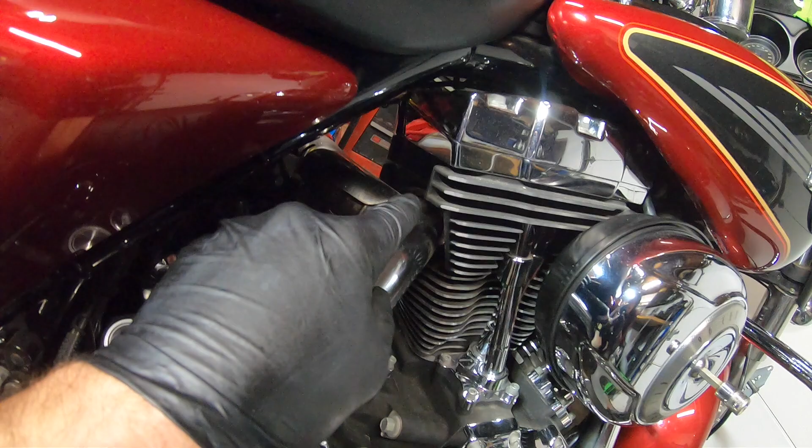So before I did anything, there's a couple bolts in here that I've been squirting with this good old PB Blaster for the last couple days, just to make sure that they'd come loose. And that is the bolts that go into the heads for the exhaust. So there's two 1/2-inch bolts on this part of the exhaust, and on the front portion of the exhaust, two 1/2-inch bolts as well. And there's a couple pieces that kind of tie this exhaust together.

This is a weird exhaust because the front tube kind of just goes back, and then the rear tube kind of ties into the side of the front tube, and then it also goes out the other side. So the exhaust comes apart over there, so you could pull that portion off, and then this piece right here, this little Y piece, this will come off of this side. So we're going to pull that off. We have to get the seat off. We're going to disconnect the battery. We're going to pull the tank off.

We'll just get the air cleaner off because it's in the way. We'll see if we can unplug all that throttle body stuff. The throttle body's right here in the middle. It's got a bunch of plugs in it, so if we have to take it off, we will. If not, we'll leave it on.

I don't know which route we're going, but I need to pull this engine out regardless, and I want to start cleaning up the frame and stuff like that. This bike has a lot of miles. This bike right here has 104,861 miles. Same bottom end and everything like that.

Now I want to go over real quick why I'm actually pulling this engine. This bike specifically, remember I told you, this first year, the 96, the crossover year. They ended up having crank problems because the crank—there's a flywheel on each side of the crank. It's got a pressed-in pin that holds the connecting rods for each cylinder. Everything's pressed together, nothing's welded, so each side can kind of, over time, get out of alignment, and it's called crank run out.

I do not. This tank has a saddle in it, so it's got this little fuel line that connects the two together from the front. I don't know how much gas we have in here. Let's see—I remember when this broke down, we just left the gas station, so I guarantee you this thing has a full tank of gas in it. Tough break. So we're gonna try to get around draining the whole tank.

A lot of talking, but I'm making this video because I want it to be as descriptive as possible, no matter what engine we choose—a 96 will just go right in, a 103 you'll have to do a couple things, no big deal. Basically whichever one I could find first. Sorry for all the talking. Hopefully that helps anybody who doesn't know anything about Harleys, because that was me like 3 months ago.

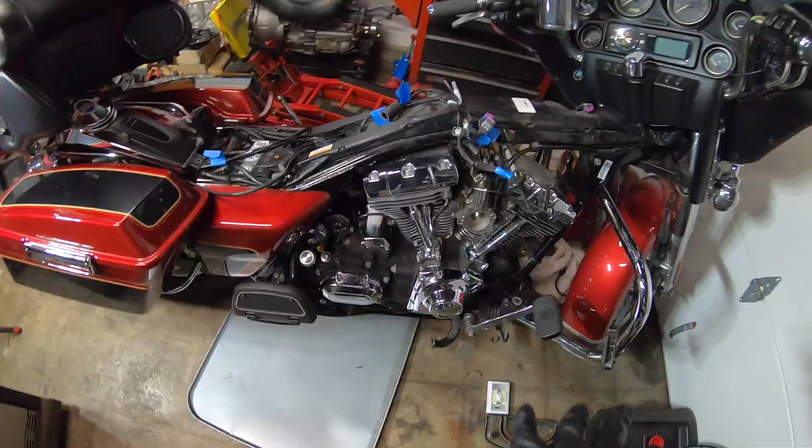Got the exhaust off. We got all these wires unplugged from the throttle body. What I went ahead and did was just kind of zip tied them out of the way, so everything from this side of the engine is free except the throttle cable.

So there's these throttle cables—there's 1, 2, 3, there's 3 of them. Either you can spend the time, loosen up your throttle cable and get them off, or you can just try to snake in there and grab the throttle body bolts. I believe they're 1/4 inch, so there should be 4 total. Then the whole throttle body would come out and you just throw it up here. I think that's what I'm gonna do.

And yeah, then we're good. Oh yeah, I had to go borrow a tool from work. So this was my original tool for the starter.

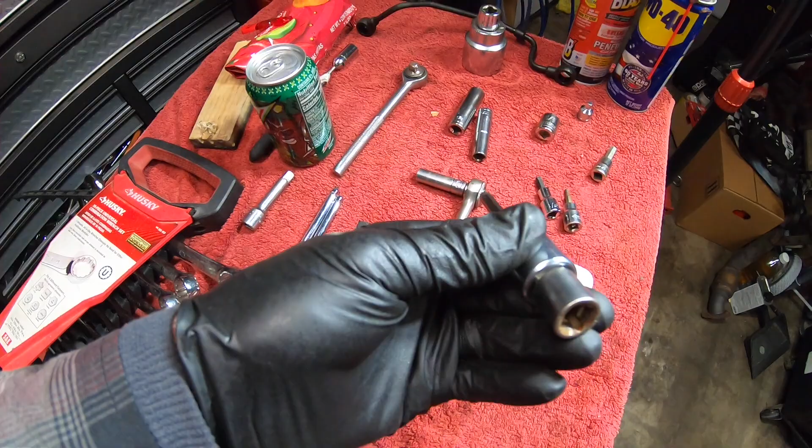It is a 1/4 inch hex Allen on a 1/2 inch drive, converted to a 3/8, and then I had it on extension. So that was really kind of a pain in the ass. It wouldn't fit in the right starter bolt. So I went ahead and went back to work and borrowed this one. This is a 1/4 inch 3/8 drive, so it's way less thick. Hopefully this will be able to crack our other starter bolt loose.

Then after that, oh, the primary. I did get the primary off. The outer primary was a piece of cake. The only problem was there's one primary bolt that was being blocked by the foot peg. What I had done was I just broke it loose from the kickstand. I did that, got the outer primary off, and then here you are down here, right?

So let me get some light on this situation real quick. All right, so here's where we're at, right? You have your compensator over here, your clutch basket over here, and then the chain that combines the two together. Then you have your whole starter assembly, Johnny, your flywheel and stuff like that.

So a few things we need to do before we start trying to pull this primary off. We got to get the starter out of there, so we got to get that other bolt out, and then I think that should just pop right out. And then we have our compensator.

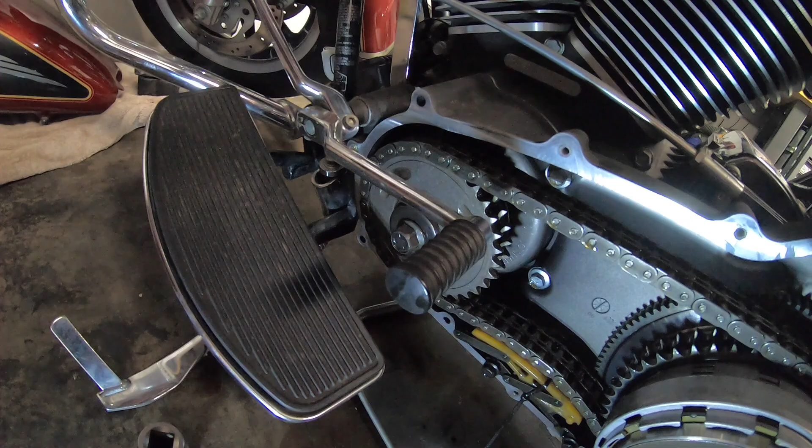Now, I don't know, I looked up a ton of things. Some say it was a huge Torx, like a T70. Some said it was like a 1.5 inch bolt. Mine, I only really have a lot of metric tools. Mine ended up being a 22, so I don't know what that equates to in standard, but I was able to crack it loose with a 22 with no damage on the bolt, really.

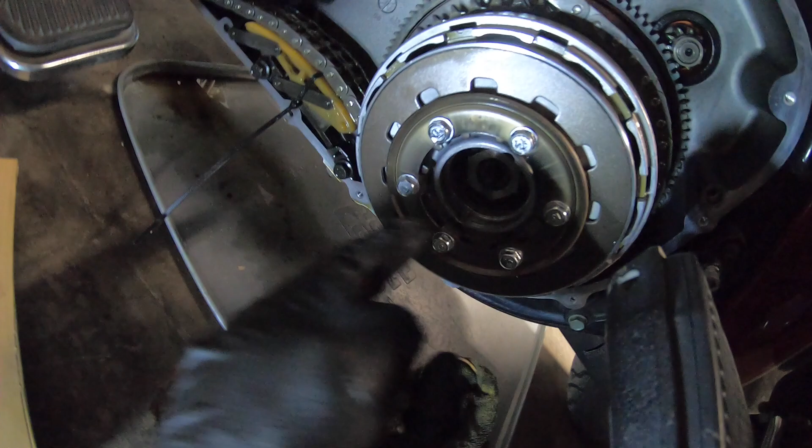And then this one back here, so there's a couple things. First things first is you have a snap ring, and then you have your clutch adjustment, and I'll show you that. I already pulled those off. So here's your snap ring. You can get that off with some basic snap ring pliers, and then once you have that out, this is what you use to adjust your clutch. So there's a locking nut right here.

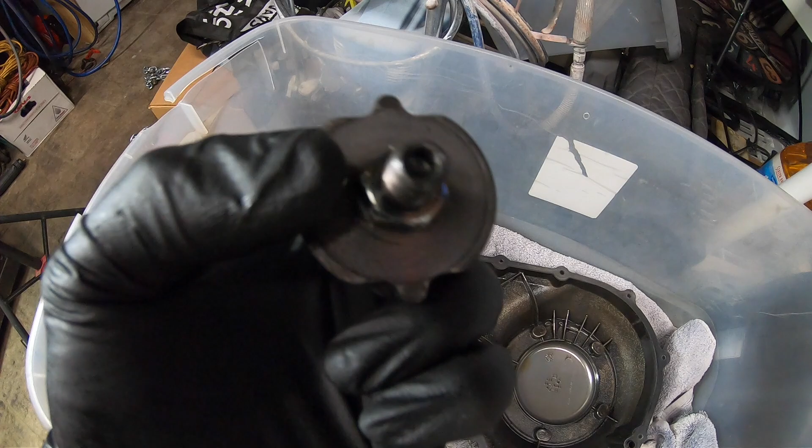I believe it's like a 7/16, and then you have an Allen. Now, if your clutch is already adjusted and you plan on putting a new motor in and putting your clutch exactly the way it was, you don't really need to loosen any of this. This just slides right out, because when you push in your clutch, it pushes out this huge rod, I don't know what you call it. And then this just slides right in there, right?

And then, yeah, once you get the snap ring out, you pull this out. Oh, here it is, now it wants to come out. Long Johnny, I'm just gonna go ahead and leave it in there. I don't know if it's directional, not really sure. I'm just gonna shove that in there, and then we have this big huge nut.

Now what's weird to me is I did look it up on the internet, and it says it is a 1 3/16 inch socket. Now I have one right here, also borrowed it from work, shout out. So I put it on here, it's got a lot of slop to it. See that? So I looked up metric, and it's a 30.

Threw a 30 on there, has a lot less play. So I think we're just going to go ahead and use the 30 mil. And yeah, so that's that. So we got starter, compensator, clutch basket.

So before you do any of that, you have this tensioner, right? So on the '07 Plus, it's an automatic tensioner, and it's pretty easy to get out. All you do is you snake a zip tie around it under the chain, and you keep it compressed. Now you want to keep it compressed so that when you pull it out, it doesn't try to go crazy on it because it thinks the chain's loose.

So yeah, what you do is you do that, you hold it together, and then there's these 2 1/2 inch bolts, so we're gonna go ahead and pull those out. It will give us slack in our chain. So if you just needed to change your compensator, you don't need to take this off. You just undo the tensioner and you can take your compensator off, you don't have to take this off. But we're pulling the inner primary off, so we have to take everything off.

So we're going to go ahead and do that real quick. Hopefully I don't break anything trying to get this bolt loose. I know I didn't mention this in the video, but this nut is reverse threaded, so make sure it's lefty tighty, righty loosey. We have a breaker bar here and a couple extension handles. We're going to get it done. Once we get that off and start pulling the inner primary off, we'll get back to you. And just like that, we got everything out.

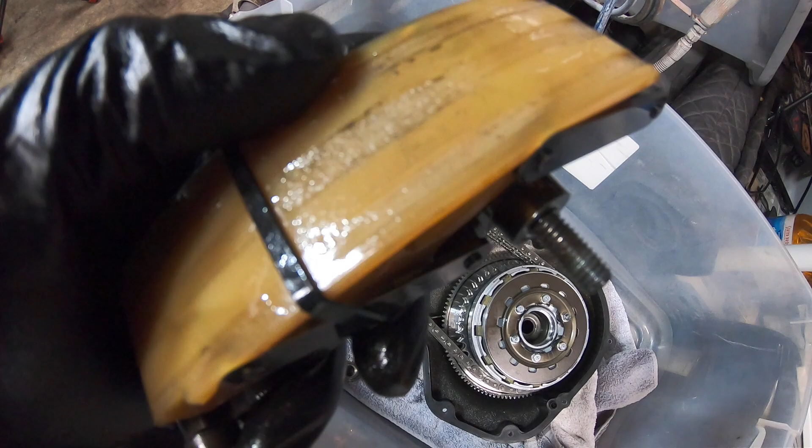Guys, I am no professional, but I watched a lot of videos and read a lot of forums, and they say if these tensioners have any bit of wear on them, or they're showing any signs of wear, replace it. So this is getting replaced. Also, I noticed when I took this off, 2 washers fell off, so make sure you keep those with that.

And this bolt was a pain in the ass to get off. I had to do it with the impact. I sat there, ooga-dooga'd it for about 10 seconds, and it started to break loose, because I believe this is red Loctite, Johnny. And here's the compensator right here.

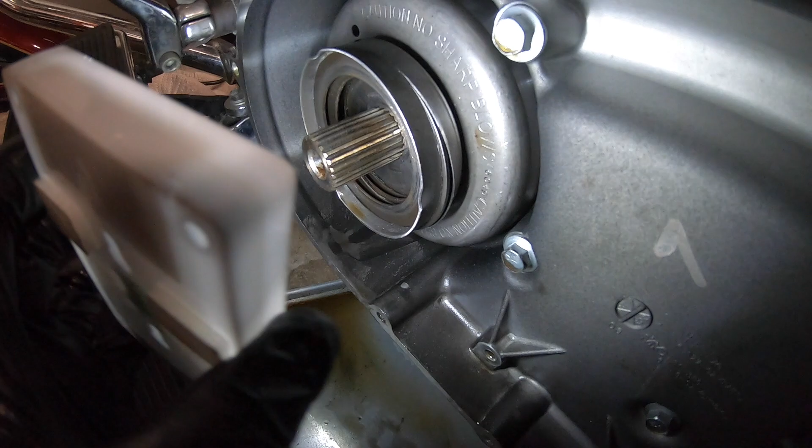All this stuff's looking pretty good. I heard you should check the spring tension on your compensator. Now either that's cracked and it looks like this thing's about to freaking explode, or that's normal. But it for sure looks cracked. So I'm really glad I'm digging into this, because it looks like that son of a bitch is about to split apart.

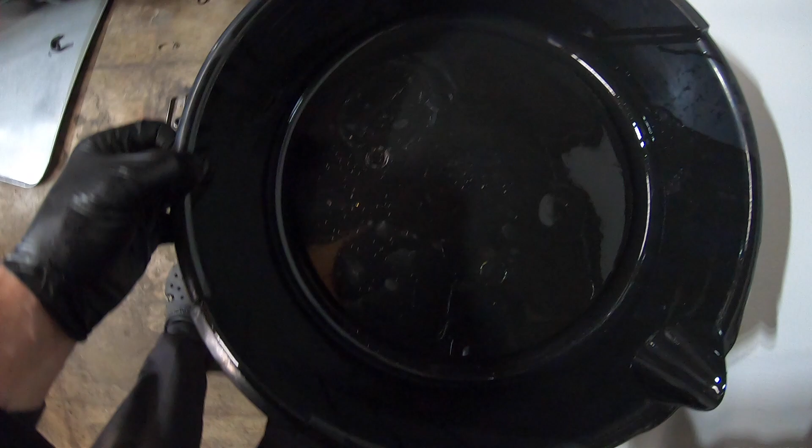The reason why I'm glad I took this bike apart, obviously, there was metal in the oil. I don't know if I showed you that yet or not, maybe I did, I don't know, I'm pretty crazy. But you see there's metal in the oil just sitting in there. So see all of it?

Ain't looking too good. So yeah, on top of that, it looks like that part of the compensator, slash the magnet for the stator, it looks like that thing's about to blow up too. So what I'm assuming is this crankshaft scissored, which means it came out of true and it just started jacking everything up in the motor. And I'm pretty sure if I look at the oil pump it's gonna be trashed as well, because once that thing comes out of center, you start messing up everything that has bearings in it.

Starter, super easy. I just pushed the jack shaft, pushed it right out of the primary. So that's it. And then 1, 2, 3, 4, 5? No way, 5 more bolts and we got this off.

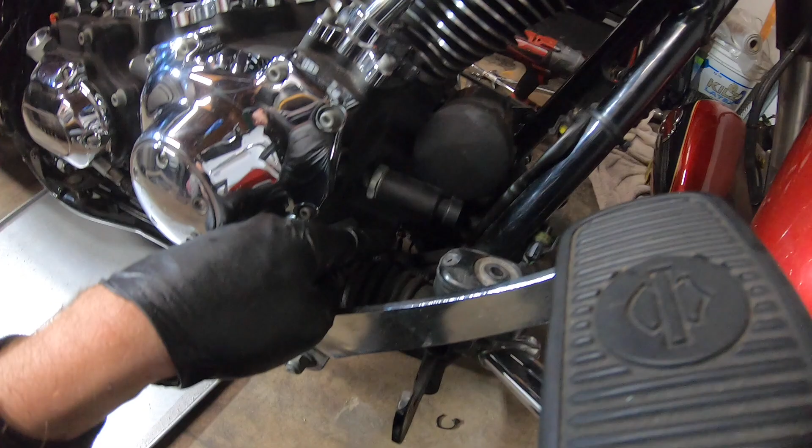I believe the voltage regulator rectifier, this up here, we'll have to see where it plugs in and where it mounts. Then you have the motor mount down here, and the motor mount up here. I started loosening the motor to transmission bolts, and the case pretty much separated from the transmission right away, so I stopped doing that. But all 4 bolts are loose. That was a 1/2 inch, so there's 1, 2, and then same on the other side, 3, 4.

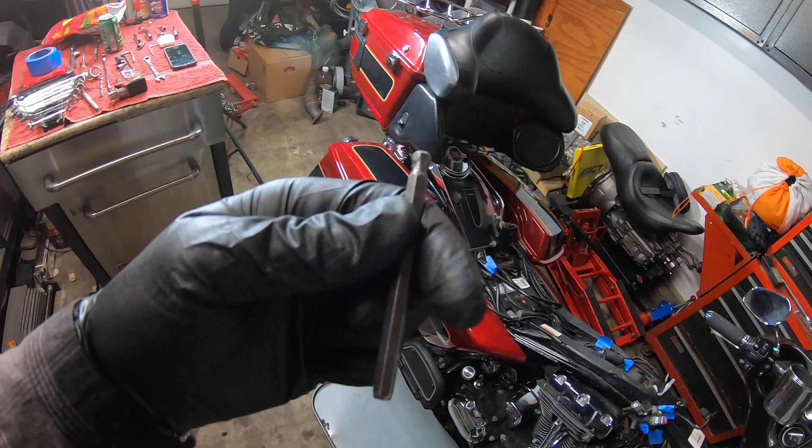Now this throttle body, I've been messing with this probably for about an hour. With the mixture of this 1/4 inch Allen wrench I cut down, I was able to loosen the 2 bolts over there on the side with the horn. And then over here, it freaking sucked, but I guess I could have used the stubby over here too, actually. What I did was, I kind of made this little swivel, Johnny, the one where you stick it in and go at an angle. So we were able to snake it down in there and get these 2 bolts out.

So the front 2 bolts on the air cleaner side need to come out, and then the rear 2 bolts you just need to loosen because they are slotted. And then this whole thing should come right out. Yeah, sure did. Came right out.

So yeah, that's pretty much it. We're gonna take this and just toss it right over here. Don't want to bend up these lines too much because there's something back there. I don't know if it's cruise control, I don't know what it is. So we're gonna bungee cord that up.

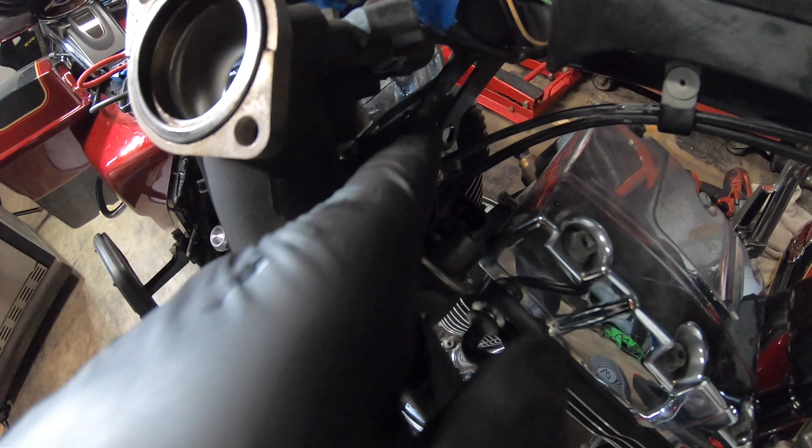And then as for the motor mount, I was able to get that out. I believe that was a 9/16, maybe. So there's 3 total bolts. One goes right here, the little Heim joint. The other 2 are actually on the horn bracket, and those go to the cylinder heads right here. Bang, bang, so there's 3 bolts right there. So that's done, 9/16. Then I took off the voltage regulator down here.

That was 2 7/16, that bolt and that bolt. So it's kind of hanging.

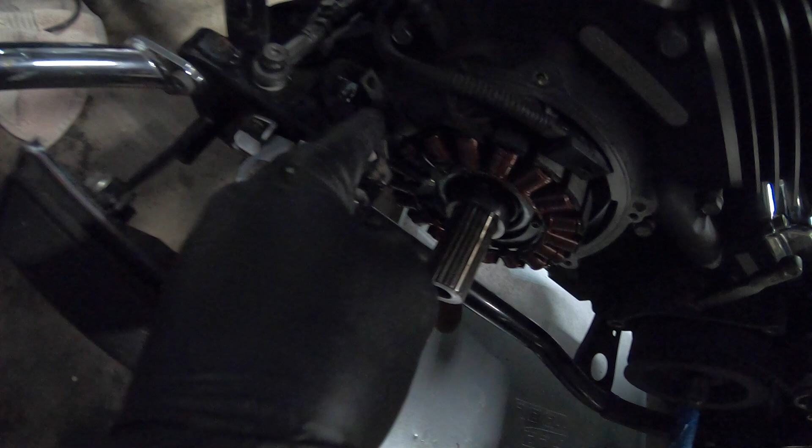What I did was I unplugged the voltage regulator and, I don't know, is that a crank position sensor? Maybe the crank position sensor. I just shoved the plugs right here where the stator's at, between the stator and the case. That's out of the way. So literally this engine is 99% free other than this lower mount.

This lower mount, I don't really know how I'm going to do it because it mounts in a few places. Here's a hard mount right here, and then there's a rubber mount down here, and then there's 2 bolts that go to the block.

So I'm going to start taking off probably the bolts that go to the block, and then the motor will be 100% free. Technically, it should freaking fall out. I believe it's doweled in between the case and the transmission. We'll go over that once it's out.

Also, what I'm going to do is get a strap, not a ratchet strap, one of those pull straps. I'm going to go around the bottom of the transmission and hook it around right here at the top of the frame, because nothing's going to be holding the transmission up anymore. We'll put some tension on it so that when we pull the motor away from the trans it just doesn't fall down or whatever. I don't really know what's going to happen.

So probably leave it for tonight, because once I loosen that front mount, there's nothing holding this engine in anymore. So yeah, anyways, I'll see you guys in a minute.

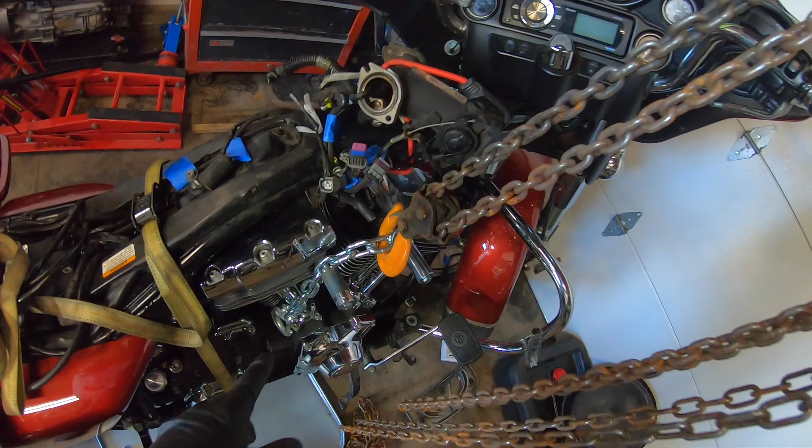I seen online people would mount a plate, an engine plate, to these breather holes. Now, I don't really think it's a good idea, but at the end of the day, this isn't like a car engine, it's a Harley engine, it's not that heavy. So what I did is I just got a long bolt, but I wanted the chain to stay over here, because the further the chain is over here, the more stress it puts on the bolt.

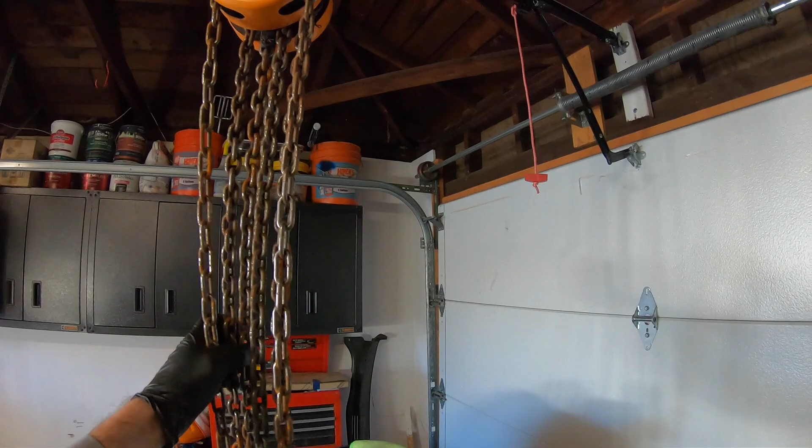So I used a socket, I kind of snugged those up, I made sure the threads bottomed out inside of the head, that way we got as much contact as possible. I had this freaking 2-ton chain hoist, here's my rafter up here, so I got this thing rigged up.

I just pulled the trans bolts out right now, so there's a couple dowels in there, we have to separate it from the dowels, so we have to push it forward. The front engine mounts, I have the nuts off of, now the bolts are just sitting in it, and we'll see if it wants to come free.

I'm gonna start, the hoist is already doing a little bit of the work here. Hopefully we can get this engine out safely and not drop it. It's not like we need it anymore, but still.

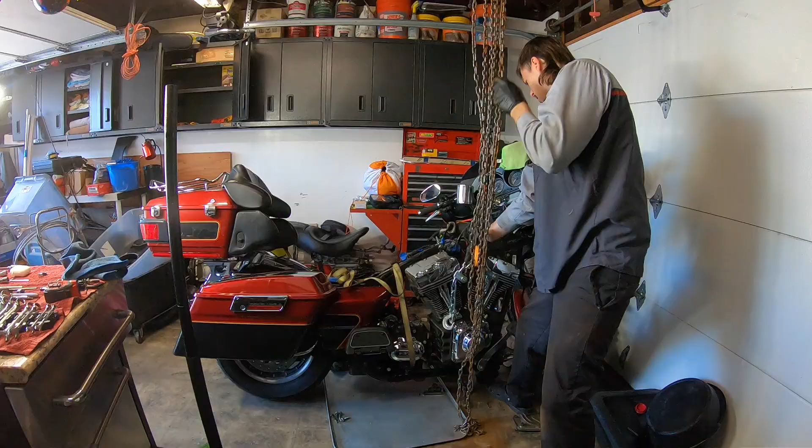Trying to be easy on this old girl. Come on, baby. Motherfucking V-twin.

We did it. If you look on the side stand, it almost puts the motor at the complete right angle, that way you're not sitting there fiddling around with it. So this is holding the weight, and then you could just adjust your level, obviously with the engine hoist or chain hoist or whatever, you could just slide your engine in without wrestling it. Now I'm going to put this down because, yeah, this worked really well, and I would hate for things to go sour real quick.

Here it is, my new to me Harley Davidson 103. Whoa, that rhymed, holy cow.

So at this point, I was just going on how dirty the motor was and how I went to clean it, but I didn't mention what bike this motor came out of. This 103 came out of a 2014 Dyna. Now, the reason why I chose a Dyna engine is because the Dyna also has a throttle cable throttle body, just like my bike. The newer touring models have those drive-by-wire throttle bodies, and it would have been a pain to convert it and switch throttle bodies and stuff like that. So this one ended up being perfect.

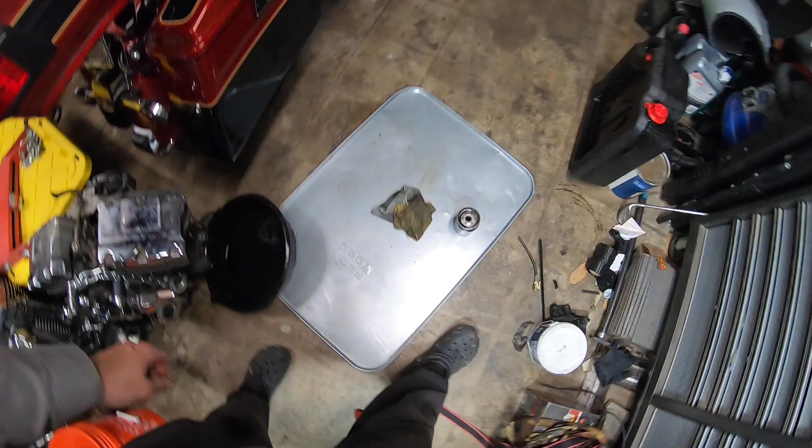Another reason why I chose this engine is because it mounts exactly the way my bike did, and it just made everything really easy and painless, and this swap was just going to be a breeze, other than the tuning, of course. So I just cut open the oil filter, and there was nothing in there. Nothing in there. The oil's really dirty.

It's a good motor overall. It looks pretty good. It says it has 20,000 miles on it compared to 100,000. This sucker has 100,000 miles, and it still looks cleaner than this one.

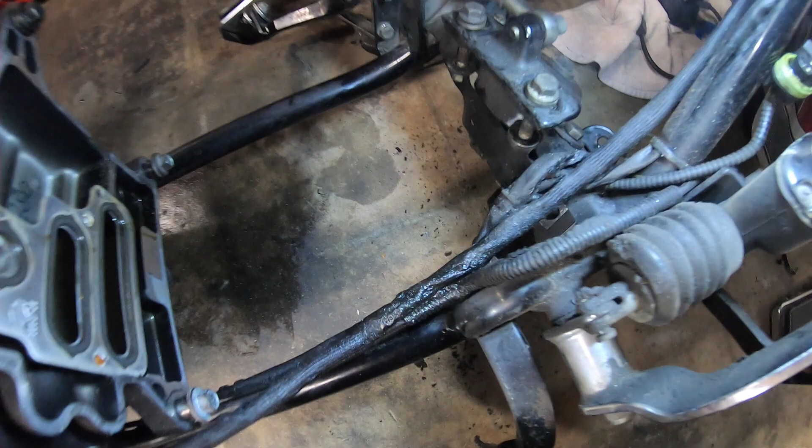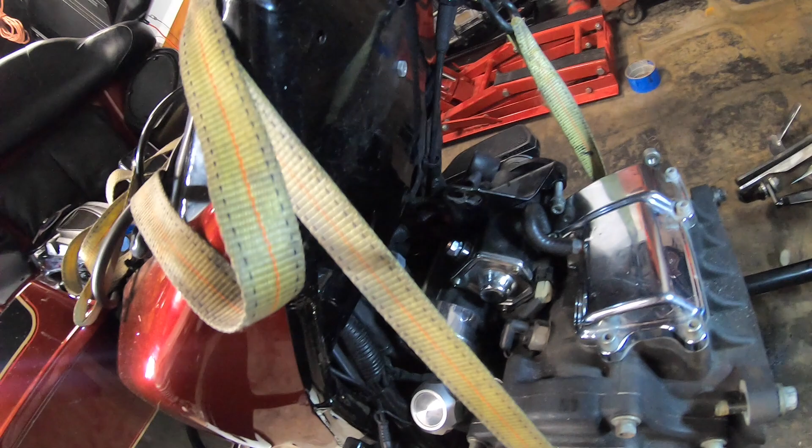And also down here on the bike, we got a fair share of cleaning to do here too. I'm gonna go ahead and clean everything on the front of the frame. I'm gonna pull the motor mount off up front. I'm gonna clean all that. Everything in the back looks pretty good. I'll probably dust off the trans, and then I gotta make sure I cover that. And I'm gonna start ordering gaskets.

But for now, we're gonna put this pan under the bike, spray some degreaser on it, and we're gonna clean it up because I don't like dirty stuff.

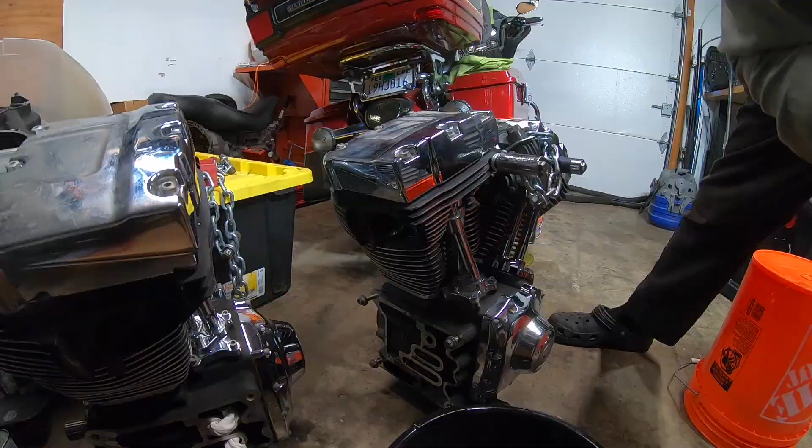Hey, we're back working on the Harley Davidson. So I cleaned up the engine. You guys saw that, so it's pretty clean. It ain't perfect, but she'll do. Once I get it in and everything kind of set back up, then I'll go for another clean.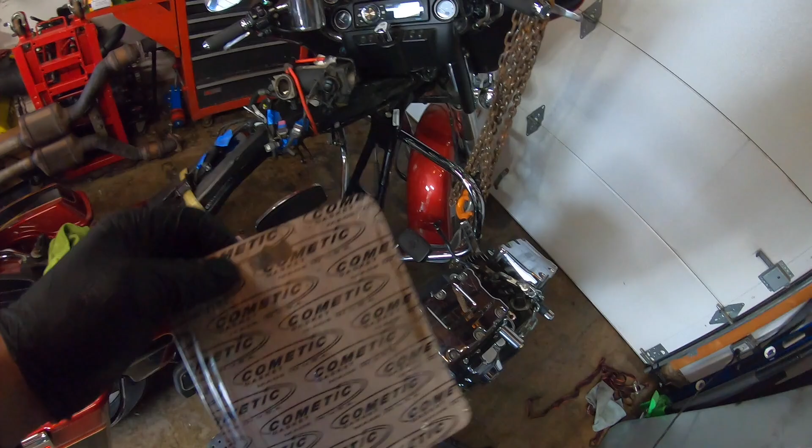I got this off of eBay. It's a Cometic gasket, so that's what I'm going to use to mate the engine to the transmission. So if you see over here, they got these little tiny push-in clips that hold the gasket to the transmission, so that way you don't have problems mating them together. There's 2 dowels on the bottom, so once we get this engine floating, we're gonna kind of tilt it in, get it on the dowels, and then we got our 4 bolts.

Where are they? I lost them already. Anyways, they're somewhere - no, those are the old ones. Oh, here they are, we got our 4 bolts right here. There's 2 short ones and 2 long ones. Don't quote me on this, but I believe the short ones go on top and the long ones go on the bottom. So if you can, chase your threads, because there's probably leftover Loctite in them.

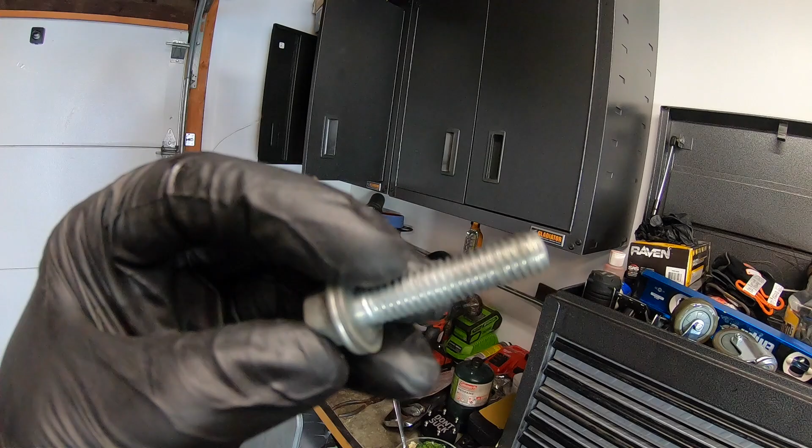And I hit these with a wire wheel. So once we put them back in, we'll put some more Loctite on it. I gotta figure out blue or red. So yeah, we're gonna get this thing hung. So I have my rig set up again right here. We're gonna get this thing nice and hung. We're gonna get the engine right back in the bike, hopefully within the next 10 or 15 minutes.

The GoPro battery died, so we tried using a phone, and then a bunch of people started coming over. So then I literally just was like, hey, help me put this in. So now I'm just starting to put stuff back together. Went ahead and wiped the motor down again because I don't like my shit dirty.

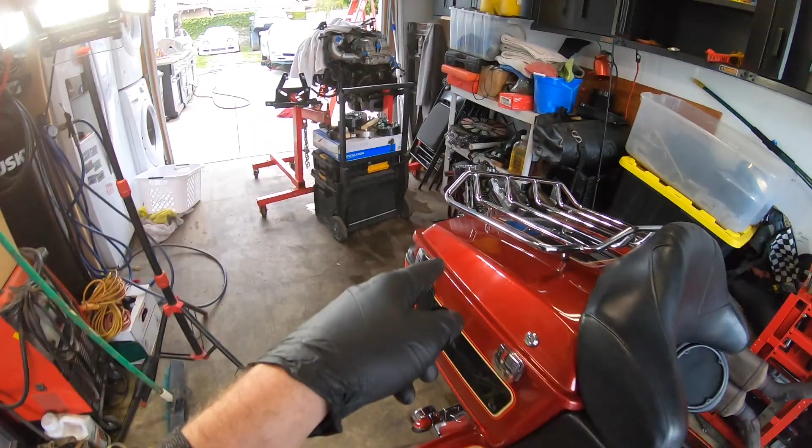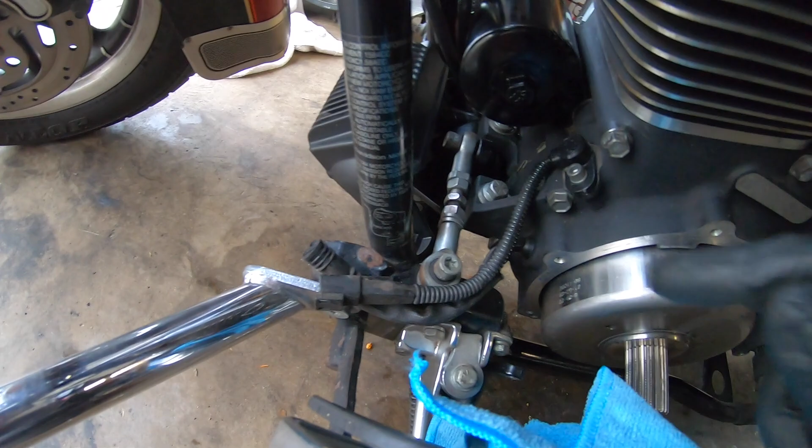Also, what we're gonna do, we put the upper mount back on. So I went ahead, put a little Loctite on those too. We got that back, the engine is fully mounted. And then I got this one back on too. I got these bolts in right there, and I was able to get some Loctite on those. It's really nice, everything looks really clean.

Now what I have to do, we're gonna bolt this rectifier regulator. Luckily, everything plugged right in. Everything plugged right in. And then what I did was I had loosened these throttle cable adjusters, and I was able to pull the old cables off of the old throttle body, which is somewhere right here.

I was able to pull the cables right off of that, including one I'm not really sure what it is, but I'm pretty sure it's cruise control. We were able to pull those off and put everything back on.

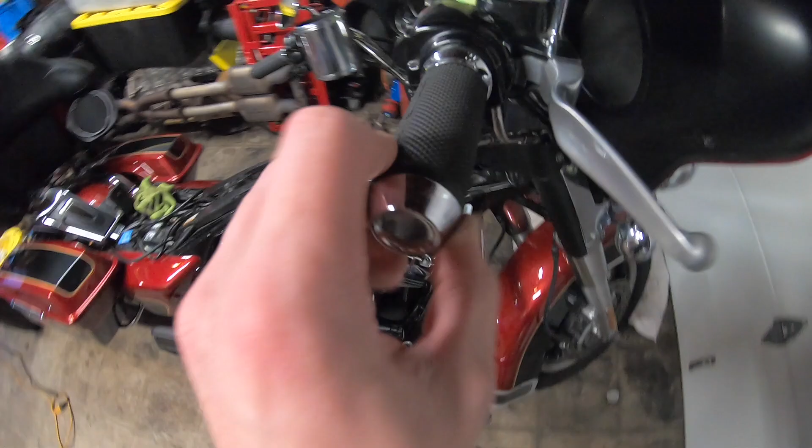We adjusted the throttle up again so it has very little play, and got a good snap. Even the old air cleaner bolted right on. Like I said, it's pretty much the same exact engine, just has a bigger bore, and obviously it's newer with less miles. So everything plugged right in, injectors and all that stuff.

I really didn't want to take the throttle body off of this motor because they're kind of a pain in the ass, but everything plugged right in. The only different thing I noticed was this vacuum line - it goes to somewhere, maybe your gas tank or whatever. The one behind it just has a plug on it, so we're gonna leave it like that. Hopefully that's okay. Everything else is done.

Now what I did do is order the automatic compression release harness, because on this 2007 model, I believe they have the revision in the ECU to allow you to enable it, but you need the harness, and this one doesn't have it. So we're gonna check out the instructions. We just got it in the mail, I'll show you the part number and we'll go from there.

Here is the ACR compression release kit, called a wire harness ACR overlay. It fits 2007-11 Dyna, 07-10 Softail, and 07 Touring models equipped with automatic compression release cylinder heads. So I have an 07 equipped with compression release, and we went ahead and got this kit. I believe if you have a newer Touring model, you'll need a different kit, but for Softail and Dyna this kit will work from 2007 to 11.

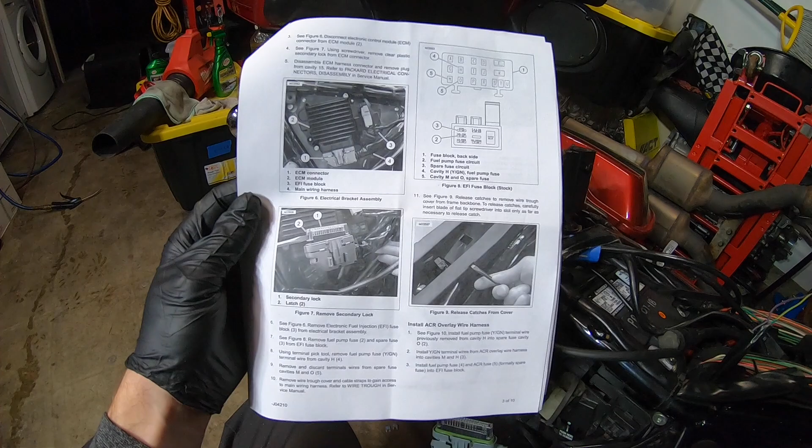Okay, I'm gonna give this a quick explanation. This is a Touring model, so I'm gonna go over the Touring model, but it has Dyna and Softail instructions as well. I'm just gonna show you this page because this is really all you need to know - you wanna freeze it, go ahead. Basically you take your saddlebag off, take this cover off, and it leaves you with all this stuff.

So here's your plug for your ECM, I just went ahead and unplugged that, pretty simple. And the instructions say you separate this plastic cover by these little clips - you just take a screwdriver, and there's 3 of them.

There's another little cover, so you need to take this off. The way you take that off is these slits have a little black pin in there - you just push it in with a little flathead, take that off, and it reveals all the pins. So I'm just gonna leave that sitting there.

So on here it says you need to take this purple wire with the ECU terminal on it and put it in pin 15. Luckily Harley makes it really easy to label - you see those two little blue plugs right there? Those are pins 15 and 16. Number 15 is on the left.

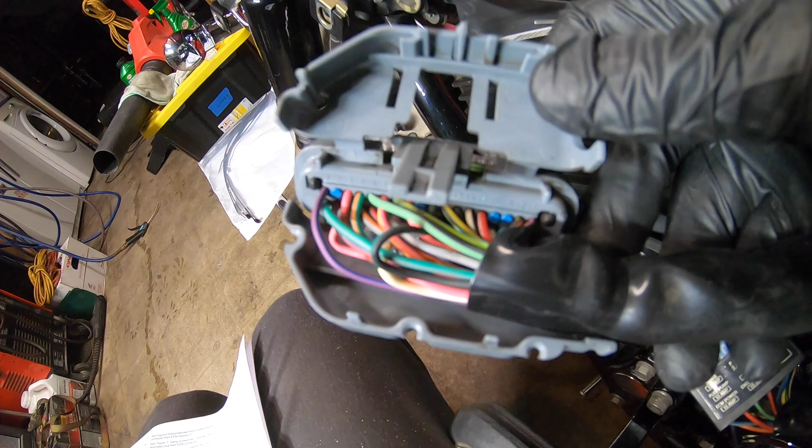So we're gonna pull that plug out and then literally just stab it in right through, give it a tug. These two blank spots right here, the pin on the left's gonna pop right through and it's gonna lock in place, and then you're good to go. You put this back on, you close that back up. So that's one pin.

The other two are the same. Basically what you do is, it's kind of weird - it goes from 2 to 1 and then back to 2, I guess.

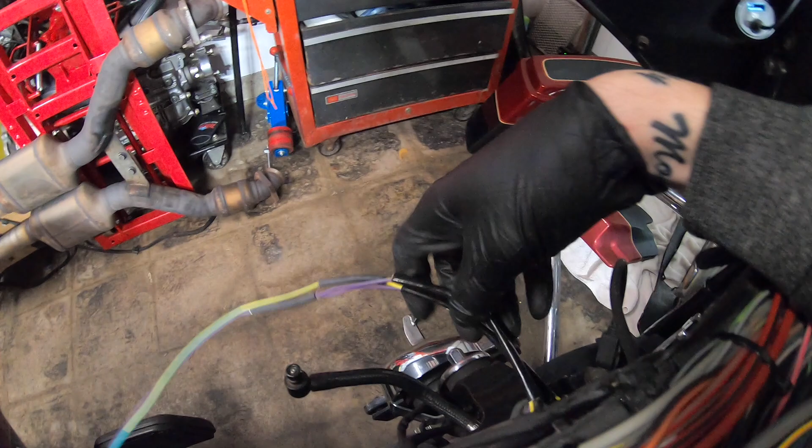Okay, so check this out. Basically what I did was take my harness, plug it into my automatic compression release plugs right here, and then feed it right through my little valley cover right here. We're gonna feed it through and tuck all these wires in somewhere, then come back down here.

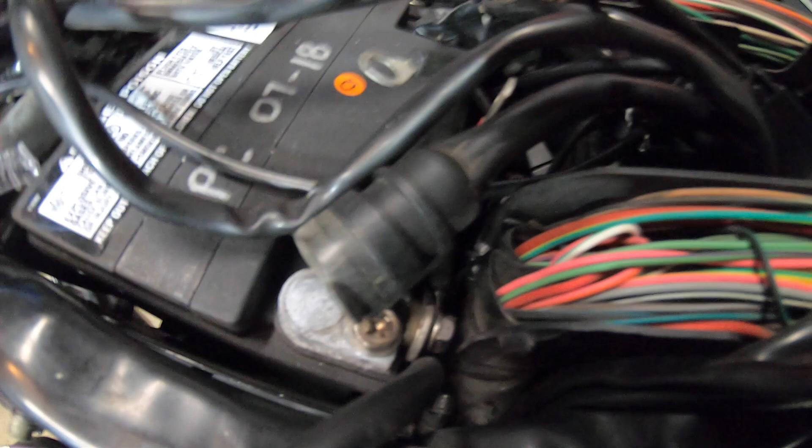There's a few ways you can go. I think there's an exit right here, so I'll just catch it out of this exit and then put that cover back on, because this cover is a pain in the ass to get back on - I already tried. There's a lot of wires in here. As you see, this one was previously crushed, but we're not gonna worry about that.

So these two wires, you're gonna be dealing with this. Now this is tucked up in there - you see where it says push here to remove? So you push that and then pull it down. It's kind of tucked up in here a little bit.

So when you pull that down, you're gonna get this, right? There's more fuses on here. I already took 2 out, see them down there. So those 2 cover these 2 spots right here on the left. These 2 in the middle, the empty ones, don't worry about it. We're gonna be working on these 2 right here.

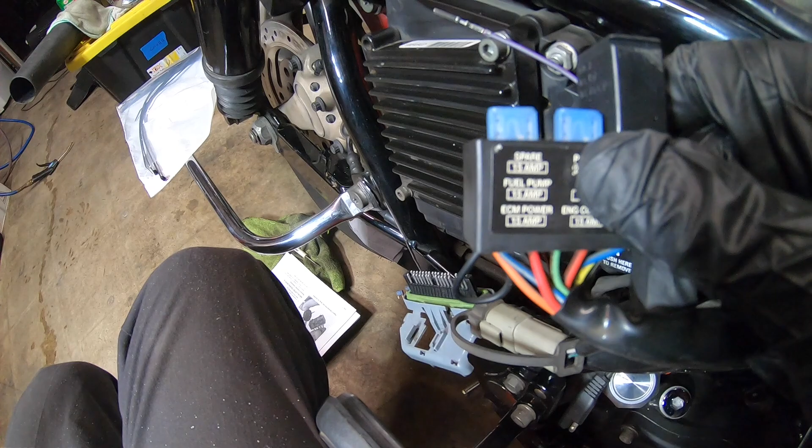It tells you right here: top, middle, bottom, spare, fuel pump, ECM. So spare fuel pump ECM. We left the ECM one in, we're not touching it. As you see the spare on the back, it's looped. You're gonna need to depin those.

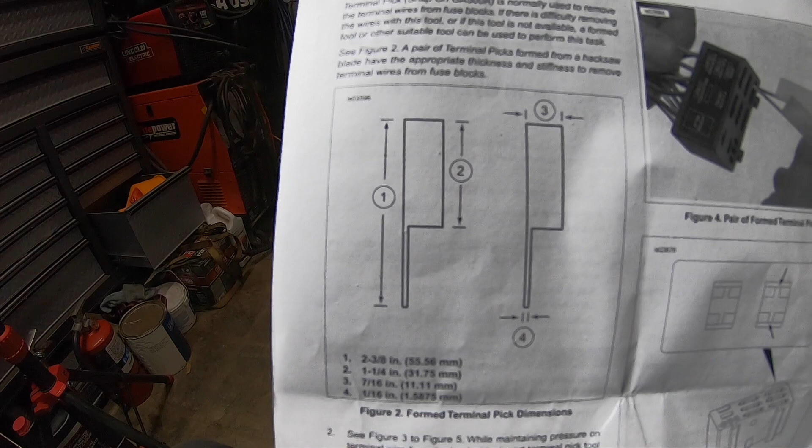If you were to buy a snap-on tool, here it is. Snap-on tool part number is GA500A. It looks like that, but I made the tool that they suggested right here. They give you all the dimensions. Basically, I just made something similar to this. They say you can use a hacksaw blade, but I didn't have anything to cut those. So what I did is took a piece of spare metal that I had lying around and I made 2 of these. They're really, really thin, kind of flimsy, because the metal has to be really, really thin.

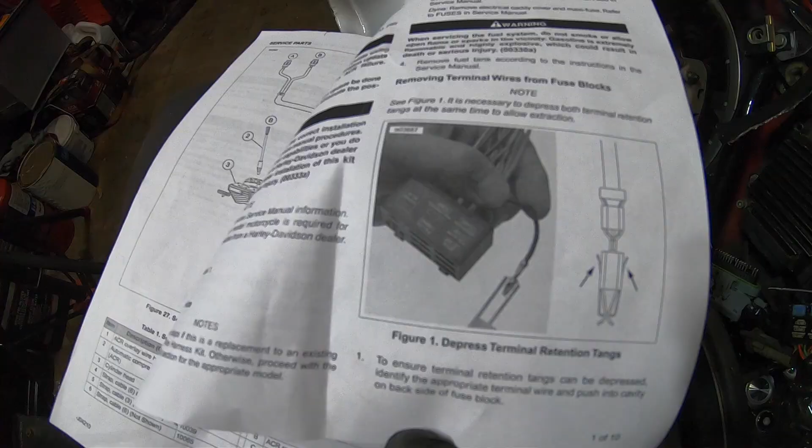So the pin looks like that. You see on the side, it has 2 wings on it, right side and left side's got 2 wings on it. You need to depress those wings with your pin. Now if you had the right one, it would look like that, but we have these, so we had to put 2 in there. Kind of keep them pressed together and depress those pins, and then you pull the pin out from the back.

And then there's a yellow and green one right here for the fuel pump, right? Yellow and green, you're gonna depin that one. So the instructions say we're looking at 3 pins: yellow and green, then this black, and then this black over here. You're gonna take the yellow and green, depin it, and move it down right here. So then you have 2 empty spots: bottom left, and then the yellow and green top right, where this one was at.

So we move that one down, and then these 2, we're gonna put these 2 in, and that's pretty much it. You're done. You tuck everything back in, put your fuses back in, and now your spare is gonna be your compression release fuse. So that was it.

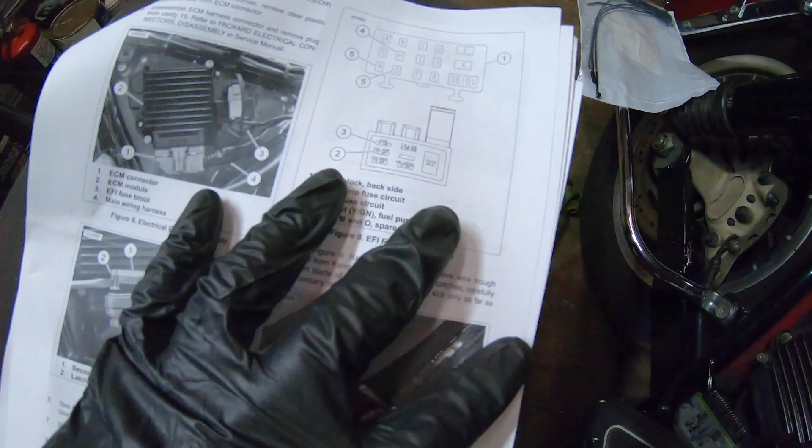So if you guys wanna look at the diagram, basically what it shows here is exactly what we were looking at. Here are the letters of the alphabet that they named them. H is previously where your green and yellow is for your fuel pump, and then here's that looped black wire, M and O. So you're gonna put H, depin it, and put it in O, and then you're gonna take your 2 compression wires out of your new harness, and you're just gonna put it in H and M, and then that's it. And then pin 15 in your ECM connector.

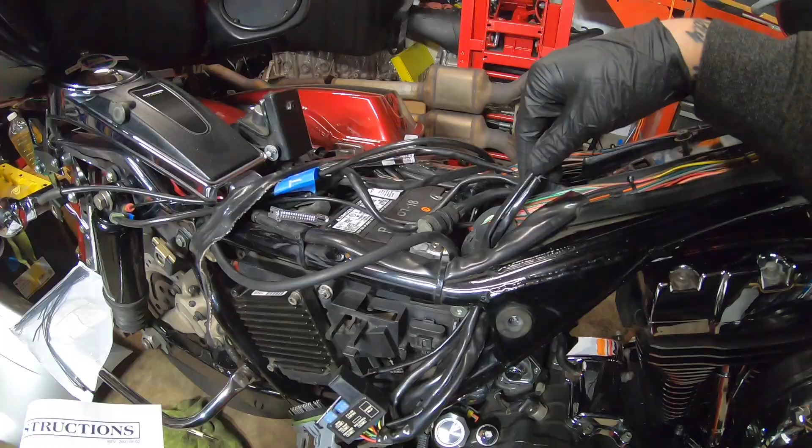This is what it looks like. So I'm gonna go ahead and tuck that back in, and then I'll figure somewhere to put that. Wanted to make that pretty simple. It took me a good 20 minutes, half an hour to kind of get everything fed right, pull everything out, clean it up. There was a ton of dust under there, so when we do take it to get tuned, or take it to the dealer, if they'll do my bike for me, I'll tell them hey, I already did that, and then they can just do the computer stuff.

So we're gonna wrap all this up. We're gonna put the tank back on. We're probably gonna try to put the right side of the exhaust on, and then we still have to do the outer and inner primary, and then this bike is done.

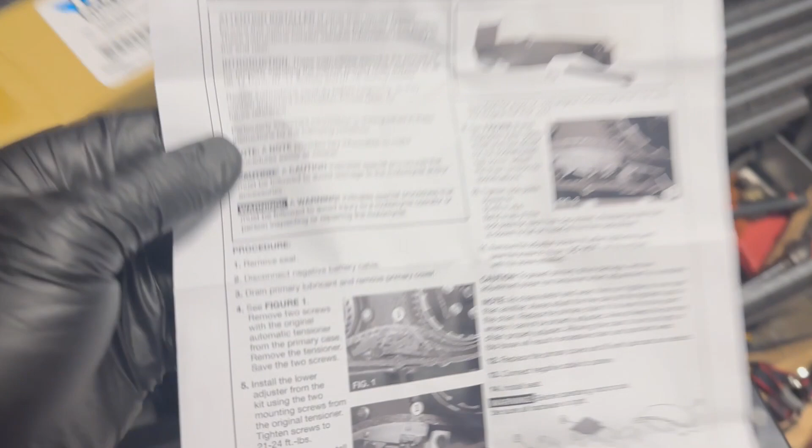Been ordering parts. I got the Drag Specialties tensioner for the primary chain. This is 07 to I think 17. It tells you right here: 06 through 17 Dyna, 07 through 17 Softails, and 07 through 16 Touring. So my bike is an 07 Touring, and the motor is a 14 Dyna, so it should be good for both. I have to use my old inner and outer primary off of my bike because the Dyna I think is longer.

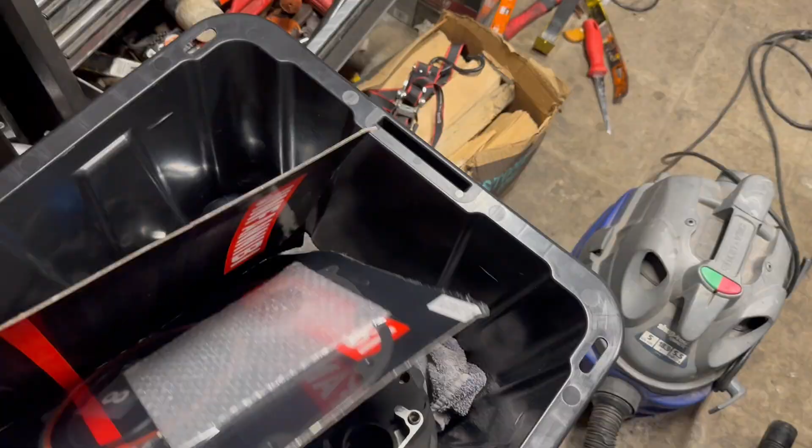I have a whole inner and outer primary kit. As for the compensator and stuff like that, we're going to use the one that came out of the Dyna. I believe technically it's an upgrade, and I believe it came with this little gasket right here. We're going to clean all this stuff up, lay everything on my little towel, and get to work.

It's really important when you do your inner primary to either buy new bolts or buy new seals. I got this kit right here, it's a Colony, apparently they're really good stuff. We got 06 and up Dyna and 07 and up Touring, so this is going to be it. Mainly we need these, but we're going to use everything. I got torque specs written down, stuff like that.

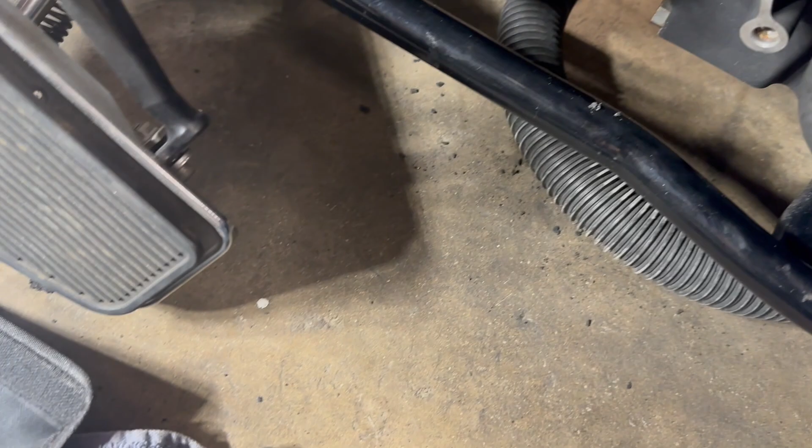I just pulled the shifter linkage off of the transmission, and there was a small snap ring, a little washer, and then this tiny shifter shaft seal that was leaking too. I got a new one off of eBay, this one is a James gasket. I heard this brand is pretty good. So, oh shit, used on 2017 through present Milwaukee 8.

Fuck, I might have bought the wrong one. It looks the same, and it said it would fit my bike, so I'm trusting that. Oh yeah, it's the same, for sure it's the same. Only thing I'm not too sure on is how far to push it in. The other one was buried in there, so I just cleaned everything here.

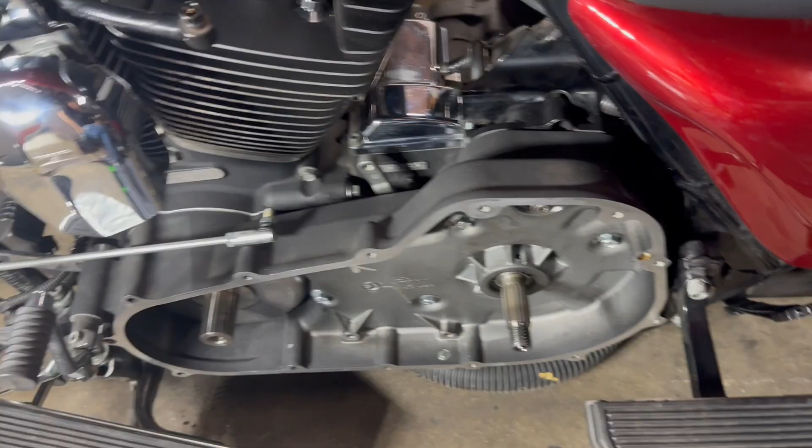So once we're done with that, we could put the inner primary back on, and we can start getting everything back together, thank God. We got our inner primary gasket over here. We went ahead and replaced the gasket back here, that was real easy, I just popped it out with a screwdriver and pressed the new one in by hand. Shifter shaft seal, also pressed it in by hand.

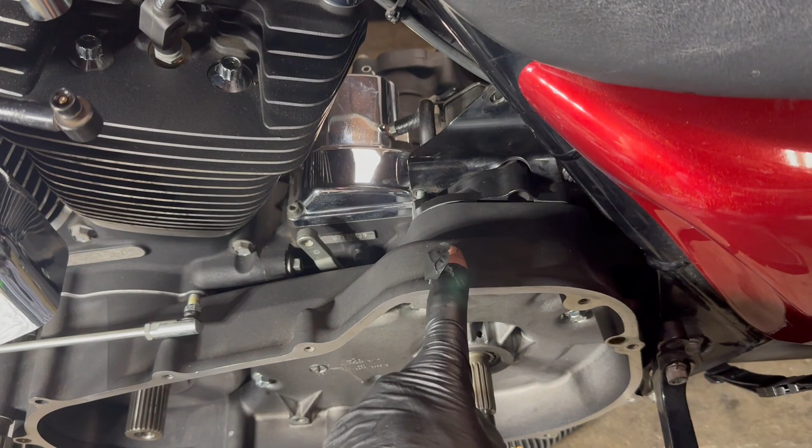The starter O-ring, my kit came with the wrong one, so I'm gonna just use the old one. I think it's actually fairly new because I've had primary work done in the past, and it doesn't feel flat, still feels good, but worse comes to worse, I think we could change that without pulling all this apart. So we're gonna send that.

We still have to tighten these quarter-inch Allens all the way up, so we're gonna do that. But right now, I think what I'm gonna do is fit the clutch assembly, the chain, and all that, and just get the bolts snug. I got the inner primary bolts on already.

There's 5 of them. Gaskets and stuff, I read online you should at least put a little bit of oil on the rubber surface and on the mating surface of the inner primary. That way, when you tighten it, it doesn't catch and rip. So I did that, and tightened them to I believe 26 to 28 foot-pounds on this specific model. I have a little cheat sheet here that I've been writing on.

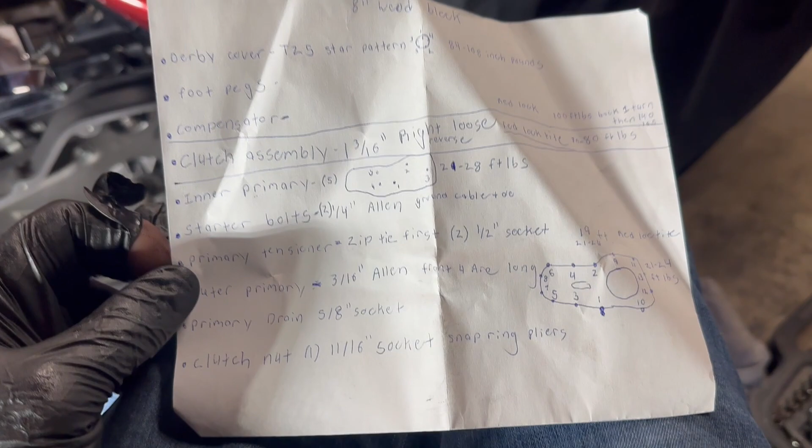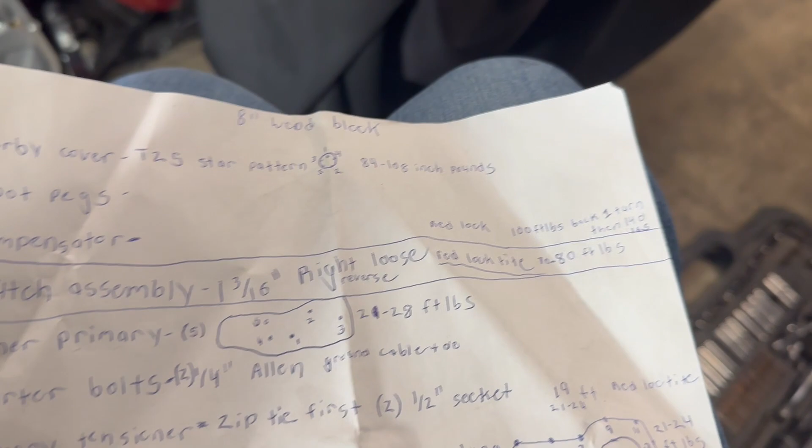Excuse my terrible writing, but here's the inner primary, and here's the bolt sequence: 1, 2, 3, 4, 5. Starter bolts, 2 quarter-inch Allens. A lot of this is unfinished, but it's good enough. Some torque specs here, the clutch assembly looks like it's 70 to 80. The compensator is going to be a tough one, it's 100, then you back it off 1 turn, then 140 or 165. This is all info I got off YouTube, so I don't know which one that is, I'll have to double check all of this information. So don't get mad at me if it's wrong, but these are my notes.

What else? Oh, that's pretty much it. I got some notes down here. I think I pretty much got it all.

I went ahead and slapped the clutch assembly on. You basically have to get it on and slowly wiggle it. You don't want to wiggle it too much because there's bearings and stuff in there, but slowly wiggle it. I was just kind of tapping it with my palm. It'll go in, just be patient.

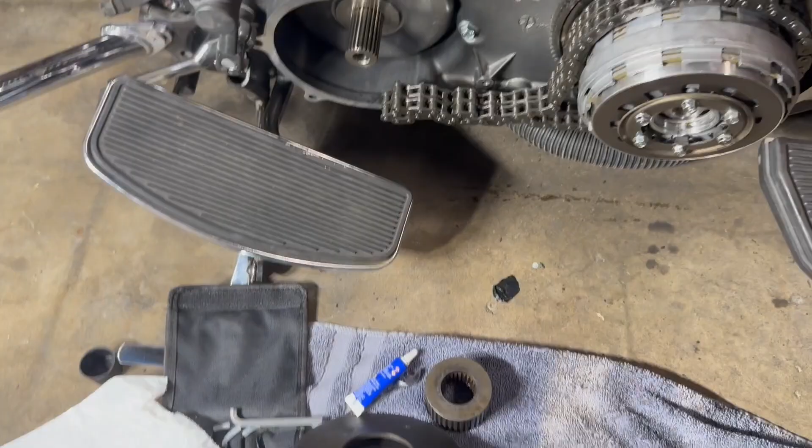Now it's time to get this Screaming Eagle compensator on, I'm pretty sure it's Screaming Eagle since I pulled this off another bike, and it's been sitting for a little bit. Just gonna wipe off the surfaces. The way this goes is, there's the stator, then the compensator goes on, then there's this sprocket, flat side I'll wipe off, goes on the inside, like this.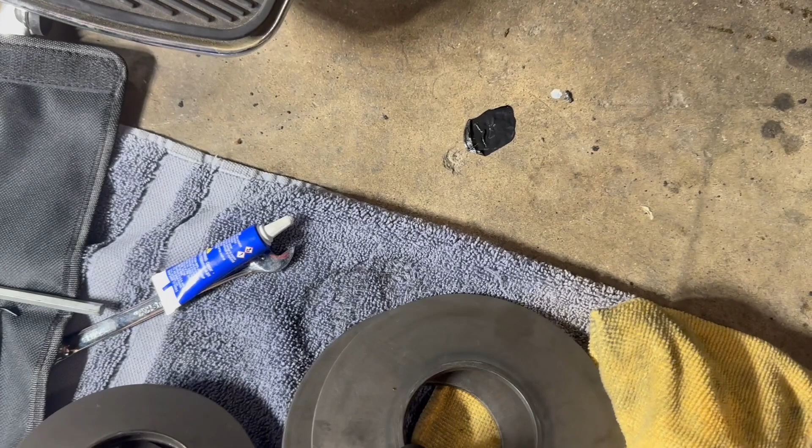So you take the big ones first. It looks like this one was closest to the compensator side, so you want to put this one on first. Make sure your sprocket's pressed up, because if it's not, look what's gonna happen. It's gonna fall behind there, and then you're not gonna know why your stuff's not gonna get tight.

There we go. Put that back on the outside. 1, 2, and then you want these to act like a spring, so you want the gap to be in the middle. You don't want to stack them. Let me show you.

You want the gap to be in the middle like this, not like that. Two medium. My bike's on the stand, so it's kind of hard to do this with one hand. And then the small one, you can tell it's concave too. Remember, you want it to act like a spring, so you don't want to stack it like that. You want to put it like that.

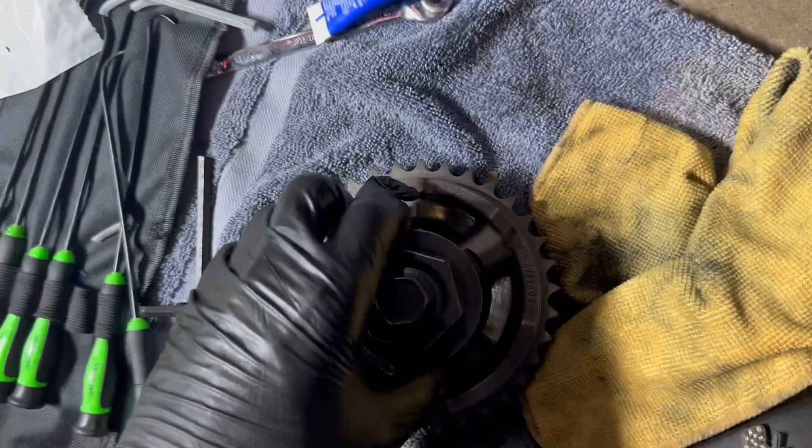And then basically you have all this other stuff that you just shove on. I took all this in order off of the bike that I was working on. So here's the outside piece, and then there's a little tiny washer. Don't lose that, keep that there.

So there's a sprocket, and then this needs to slide on the splines. Put the sprocket on the chain, then you slide it on, or else you're not gonna be able to get it on. I'm gonna knock that out real quick.

Got everything torqued up. For the clutch assembly, I put a dab of red Loctite on there. I've seen people put blue, seen people put red. I just went ahead and put red, so hopefully that doesn't jack me up in the future. But that was 70 to 80 foot-pounds.

Real quick guys, I wanted to add in here while you're doing this, the clutch basket nut is reverse threaded, so make sure it's righty-loosey, lefty-tighty. So I went ahead and did 75 on that. Now we can put this sucker back on.

This is our clutch adjustment, and then there's like a snap ring that goes in there and holds everything in place. Compensator, red Loctite. I put a little bit more Loctite on that than I did on the back, pretty generous.

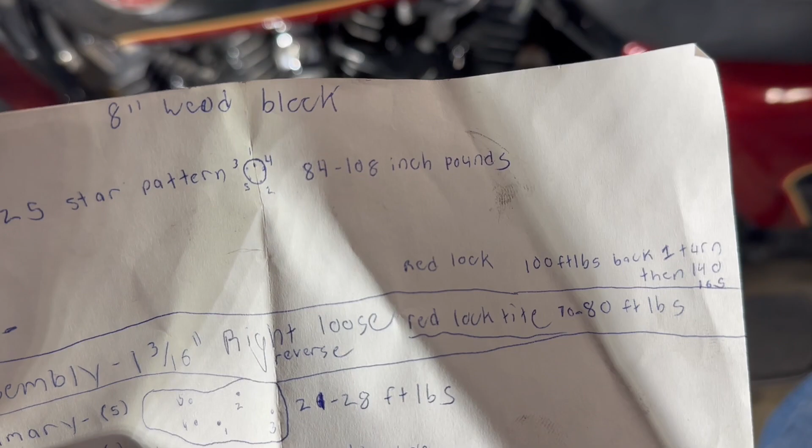I bought this tool off of Amazon, helps a lot. Some people just cut up wood and jam it in there, but this was less than 10 bucks. I went ahead and bought it because I had to use wood to take it off, and it was a nightmare. So got the right tool for that.

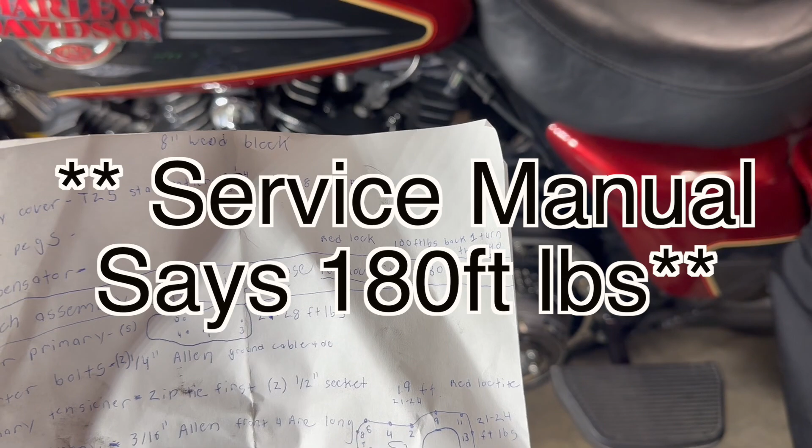It says torque that son of a gun to 100 foot-pounds, back it off 1/2 to 1 full turn, and then you tighten it again to 140. A couple videos I watched on YouTube, some people tightened it as much as 165 right here. So I went ahead and just did 150, and then a little extra.

Here's my torque wrench, got it from O'Reilly's Auto Parts. Pretty good torque wrench, it's been pretty accurate for a while, so I went ahead and used that. So that was a 1 3/16, and then I didn't have whatever that other size was, so I went metric on that. I used a 30 millimeter, whatever standard is, I didn't have it.

So now we can put the clutch adjuster back on, and then we can move on to the Drag Specialties tensioner. We installed this Drag Specialties primary chain tensioner.

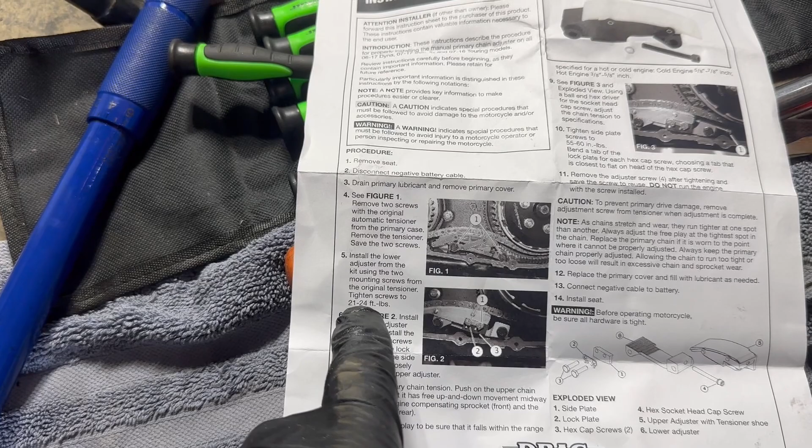Came with some instructions. So basically you just take the old one out, put the new one in, you torque it down to 21 to 24 foot-pounds, and then it has these two little locking bolts. So you leave those loose, and then there's a bolt that goes in the side of it. You use that to slide this over manually, and then once you get your chain tension, you can go ahead and tighten up these bolts and fold over those little locking tabs.

These bolts, they should be no tighter than hand tight. I think it's like 5 foot-pounds.

As for the chain, what I do is I just push it down, and then I put a measuring tape there, and that sets my zero. Then I go up, and it needs to be between 5/8 and 7/8 of an inch of chain tension, cold, at the tightest spot of the chain. So I also pulled the spark plugs out, rolled this over, and kept measuring it until I found the tightest spot. And that's when I set my chain tension.

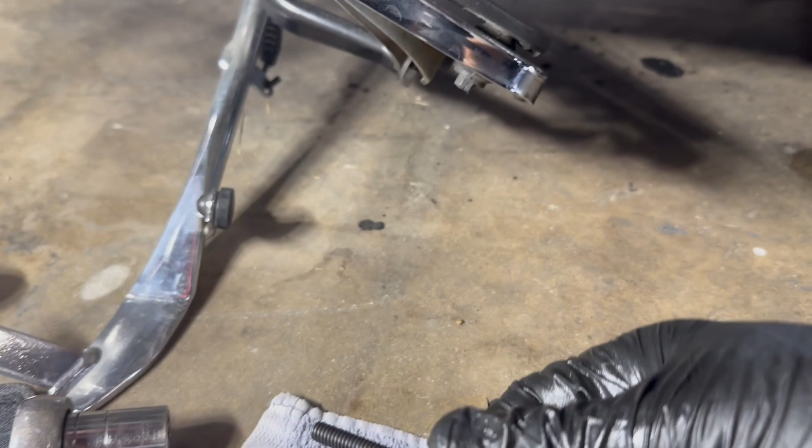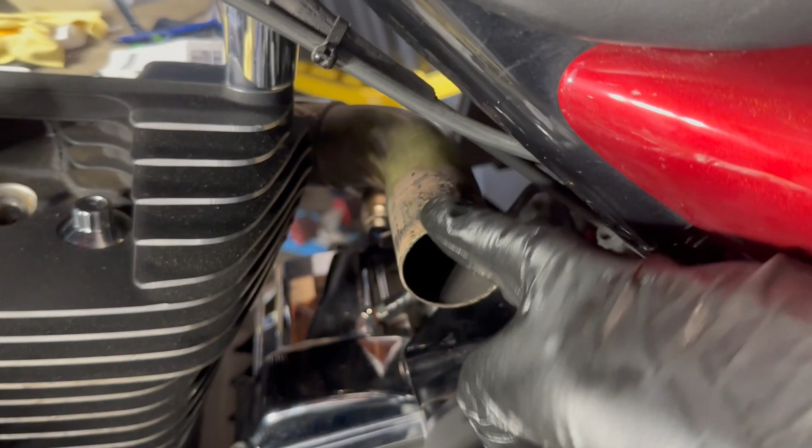So now I know that this is about 3/4, almost 7/8, and we're gonna lock that up. We took the bolt out. You don't leave the bolt in there or else it's gonna start messing stuff up. Now we're ready to put our cover on, and then we'll throw all the fluids in the bike, and the exhaust. Got the other side on, but now I gotta get this side on, and then I can tighten everything up.

Woo-wee! All right, woke up early, hitched a ride to the shop from my girlfriend, fiance, thank you very much. And I was able to pick up my bike. The tuner did a fantastic job.

It runs freaking awesome. Before I go out to the bike, I'll fire it up real quick for you in this video. I wanna go over the tuning software and who tuned it, because he did a really good job, and I just want to say thank you. If anyone in the SoCal area, he's kind of in the South Bay, I think in Gardena. He's really good at what he does. So I'll show you the dyno sheet and the tuning software that he used.

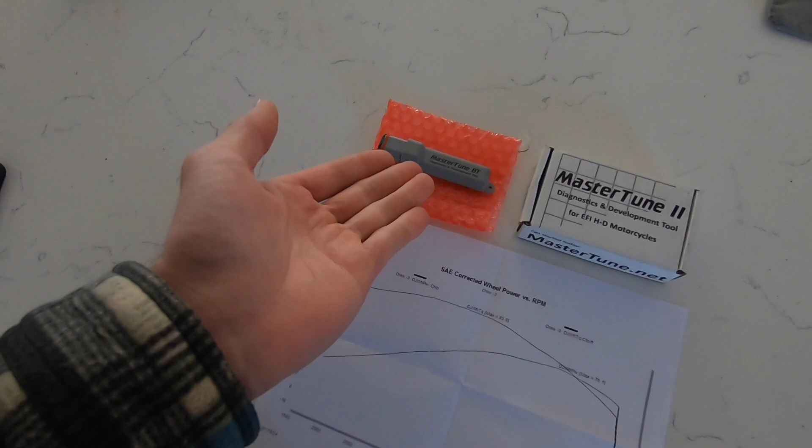So I have this Master Tune 2 Bluetooth adapter. It just plugs right into your bike. I think the brand is TTS. So you had to buy that, but now it's good. Now when you want to retune your bike, you already have this. All you have to do is pay for the tune.

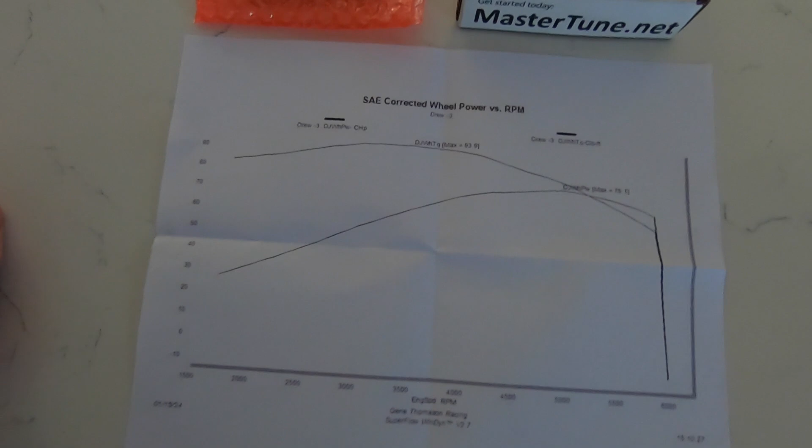The dyno sheet, it actually came with it. The company right here is Gene Thomason Racing. Gene Thomason's really good at tuning, I've heard a lot of good things about him. Right here, the max horsepower we have is 75.1, and max torque is 93. So 75 and basically 94 foot-pounds of torque. That's way better than the 96, and I know, because when I was riding that thing, it's quick. Not fast, it's quick - throttle response is really snappy.

I got a K&N intake on there, some Thunderheader slip-ons, and the engine's unknown - there could be a cam in there, I don't really know. I just bought the engine used for $1,000. So overall, this whole swap cost me a little over $2,000, with the gaskets, new rear tire, new spark plugs, stuff like that. To get my bike back on the road cost me a little over $2,000, which isn't bad, because normally a used engine alone is around $2,000. So it runs really good, and I'm very happy with it.

Let's go out to the bike real quick. Just drove it home not too long ago, a couple hours ago, and it handled fantastic. I put the engine in myself, you guys seen that, and then I brought it over to my stepdad's shop at Peak Performance Customs over there in Harbor City.

He helped me wrap it up, just little things - like I had a small fuel leak right here, so there was a bad O-ring and he had the parts to replace that for me. We did brand new Harley Davidson spark plugs. Since this is a 103, he had a bunch of takeoff parts, so he got me the 103 intake boot, so we got that on there too. Now it's legit. We got a new battery in here because the old one was on its last leg. The tire kept going flat - we found out the valve stem was bad, but since the tire sat flat so long it had a bunch of cracks in it, so we got a brand new tire.

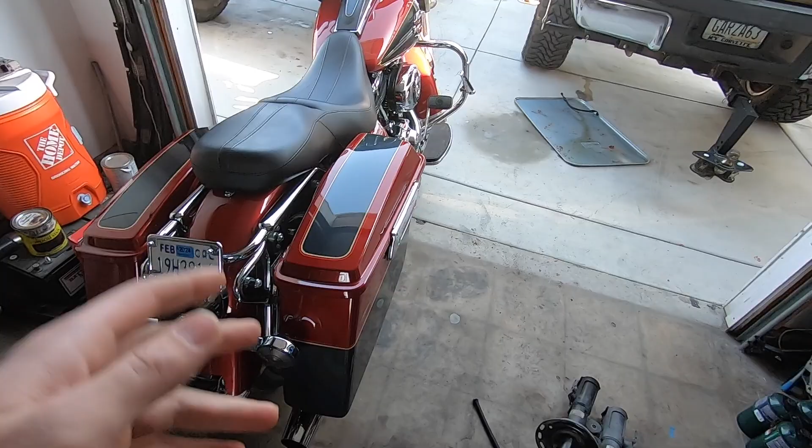Other than that, everything's good, no oil leaks. I went ahead and checked everything, it's running good so far. I think the tuner probably put a couple miles on the dyno, then we rode it back to his shop, another 10 miles, then I rode it home, another 20 miles. We got about 30 miles on this thing.

Let's fire it up real quick. It's kind of loud, so I'll just fire it up for a second and then rev it out. Thing runs like a top - check this out.

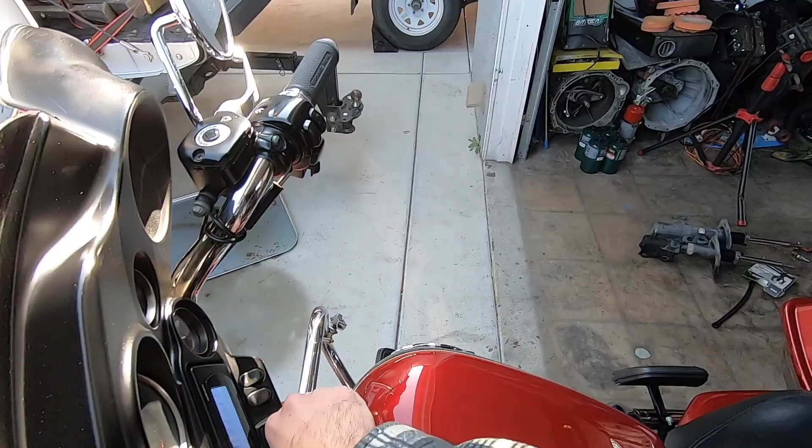And the whole garage smells, but that's pretty much it, guys.